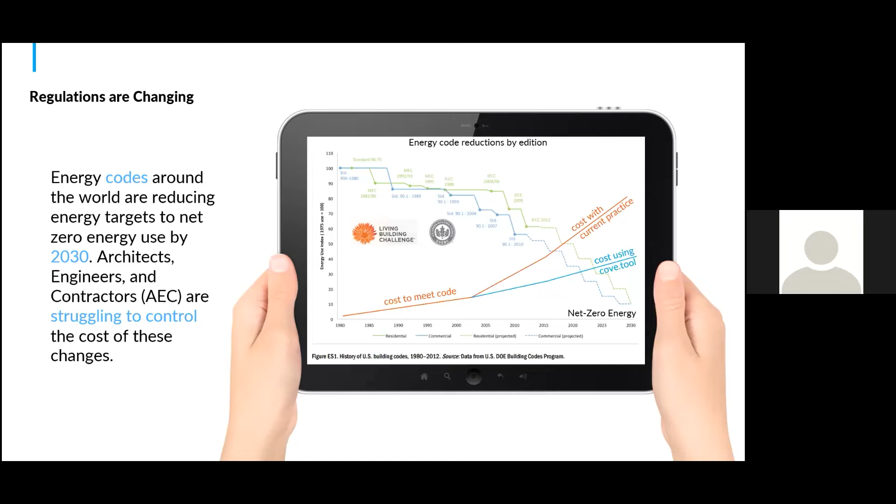And as we go through the case study today, we'll mix in real-time expertise and skill sets so we can understand how we can do this. And we'll build it in with the case study to talk about how the team actually utilized all of the performance data to actually make a difference and impact on their projects.

No surprise there. Imagine having to change your entire facade design at 80% construction drawings. That's a fairly expensive design revision; you have to coordinate across all the different consultants, sub-consultants. Someone has to spend a lot of time making sure everything is reconfigured. That's an expensive design revision.

Despite the fact that that is the least comfortable phase to make any design changes in, right? That construction drawing phase. That is where all of the traditional building performance modeling happens, because we're not doing it to drive decisions. We're not doing it to drive data-driven thinking. We're doing it to check boxes.

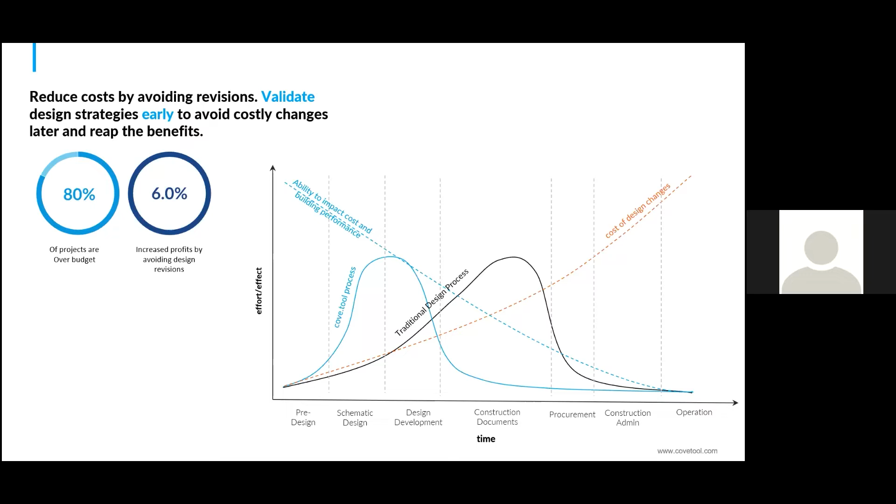The workflow that we're going to look at today is how we can shift that process earlier on into the design, into pre-design, concept design, schematic design, early design development, so that by the time we make it to the construction documentation, we don't have to do those expensive revisions, of course, increasing our project profitability by up to 6%, which is a really big deal, especially when margins are razor thin in the competitive market that we currently are in.

Now, prior to creating cove.tool, I ran a successful consulting practice. And in this sustainability consulting practice, me and my team worked on just about every type of project that you can imagine. Everything from a 5,000 square foot retail facility to millions of square foot office space, to labs, to healthcare, multifamily, hospitality, everything in the middle, all the way even to actually designing cities in different parts of the world, urban planning.

And what we realized was that no matter the project type or the project size, we always had to do a few core pieces of analysis. We always had to do our climate studies, right, to collect climatic information of where we're designing at. We always had to do benchmarking so we could figure out how our project compares to the rest of the country or the world. Had to do some conceptual energy modeling so we could really balance our project to that benchmark. Do some parametric studies, which is just another way of saying running iterations.

Do daylighting studies, glare studies, shadow studies, facade studies, and of course, pull everything together in a nice, easy to use report, because that's how the team makes a decision collaboratively, right? By utilizing outputs from a report.

And even on the simplest project, now granted, this was a good 5 years ago, and we were billable at about $150 an hour. It took us 250 hours. I'll let you all do the math of any price escalations that may have happened. Let's put it at $200 an hour. I'll let you all do the math on just how expensive it was to bring us on a particular project.

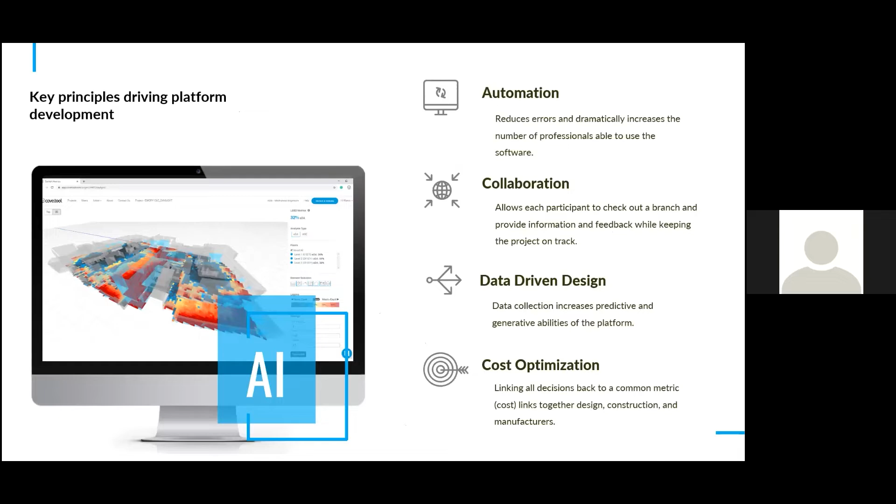Here's the case study that I want to share today. It's the third classroom and engineering building project designed for the University System of Maryland by Cooper Carry Architects and AEI engineers. And this is a 75,000 square foot classroom, lab, and dining project.

This particular team started the project and set up some high performance goals. In terms of energy, they wanted to be 30% better than industry benchmarks. In terms of daylighting, they wanted to meet at least a 55% SDA, which is a spatial daylight autonomy.

Basically means the amount of your floor plate that can operate without electrical lighting. They wanted to get to be under 10% of ASE, which is annual solar exposure. That's a glare metric, right? So just like SDA is the amount of daylight metric, ASE is the quality of daylight metric. So it's how much of your floor plate is in the threat zone for having too much glare.

So after setting these high performance targets, and the daylight and glare targets also coordinate very, very closely to what's laid out in the LEED and WELL building standard, which this building was thinking about pursuing. They weren't convinced right away, but they were thinking about it, right? So it's helpful to get your goals aligned early on.

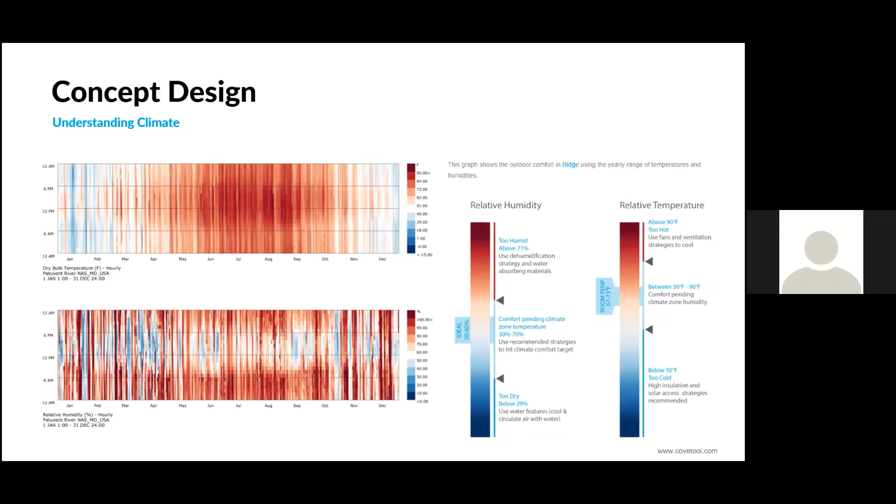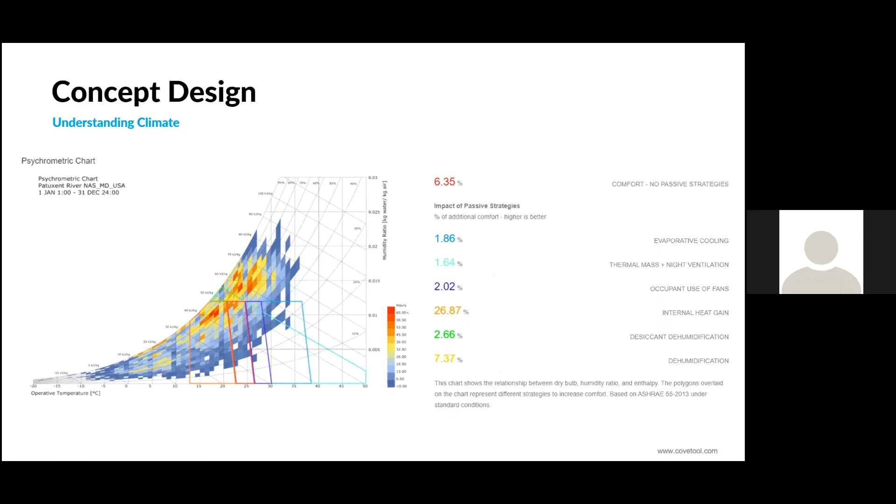If I know that thermal mass or evaporative cooling is not giving me too much help, right? It's under 2%, even occupant use of fans aren't helping either. I wouldn't spend time. And if I know that already in concept design, I'm not going to design outdoor porches with giant fans and use evaporative cooling because I already know that they're not effective strategies. The amount that they yield in comfort is extremely low. I'd be spending my effort on dehumidification. I'd be spending my effort on internal heat gain. And it's the ability to be able to see it all right away, automatically, that makes a really, really big difference.

The team was then able to also look at benchmarking to understand exactly how other buildings of the similar program performed, right? So the national average for this particular program was at 100 EUI, which is the energy use intensity, the amount of energy your building uses per square foot over the course of a whole year. Now, at the time, the 2030 targets would have wanted them to be at 30 EUI. The team wasn't committing quite that far, but they were wanting to be much better than national averages. So they set their EUI targets at 60 to 70 EUI, not by guess, not by just thinking here's what others are doing, but by looking at data about their program and their building in their climate zone and having that intelligence in real time.

They also utilized the same time to set up their benchmarks for daylighting and glare. And that was pretty much all they did in the concept design phase, is really set themselves up for success. Now, let's take a quick look to understand how we can start doing that together as well. So here we have it.

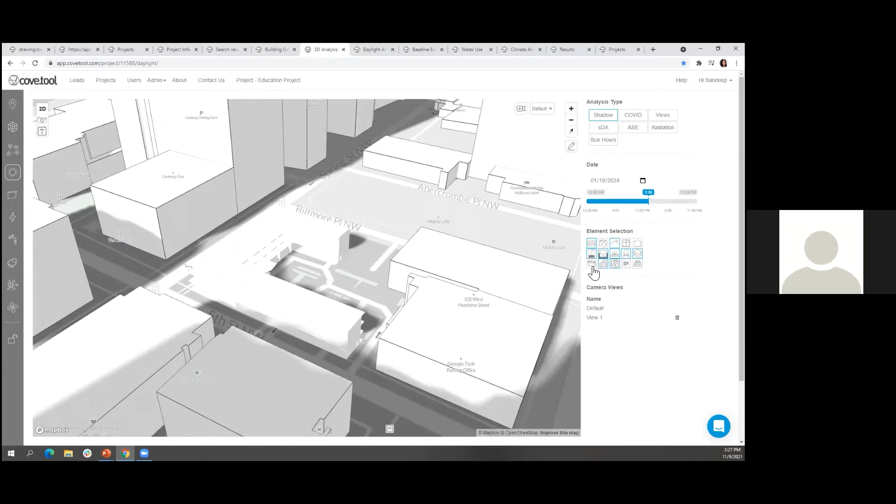So this particular team brought in their geometry, and then they moved on to the very next step of actually running analysis. Now, this analysis page, there's a lot of power here. Let's talk about it for a few minutes. Let's talk about what the key parameters are. Let's talk about what each different analysis type even means. And let's talk about how we can all start using it and how this team used it on the case study project. Now, just from a quick interface overview, we can see a whole range of analysis types covered here.

The key thing to note, this reminds me of back in the early days, right? When I was doing this manually, I was doing it as a consultant. Each and every one of these tabs would easily take me 20 to 30 hours. It was just so difficult to have access to this data. And it took so much technical expertise for me to be able to do that I couldn't say that everyone should be able to do this analysis, because it just wasn't possible. It was so difficult. I had to do so much debugging.

And my ultimate goal, at this large firm, I used to sit next to this fantastic principal. He was an extremely gifted designer, really, really good, and had done some really incredible projects. He was a tower designer, right? And I always used to admire his designs, but my gosh, Jimmy, while he was an incredible designer, he could not use technology for the life of him. And luckily, I was all about data and I was all about technology.

So I always used to run this analysis for him, like I did for everyone else in the 300-person Atlanta office. So I was the bottleneck. If it didn't go through me, it didn't happen at all. So my goal was that as we create cove.tool, Jimmy should be able to run every single analysis. And that is exactly what users have found.

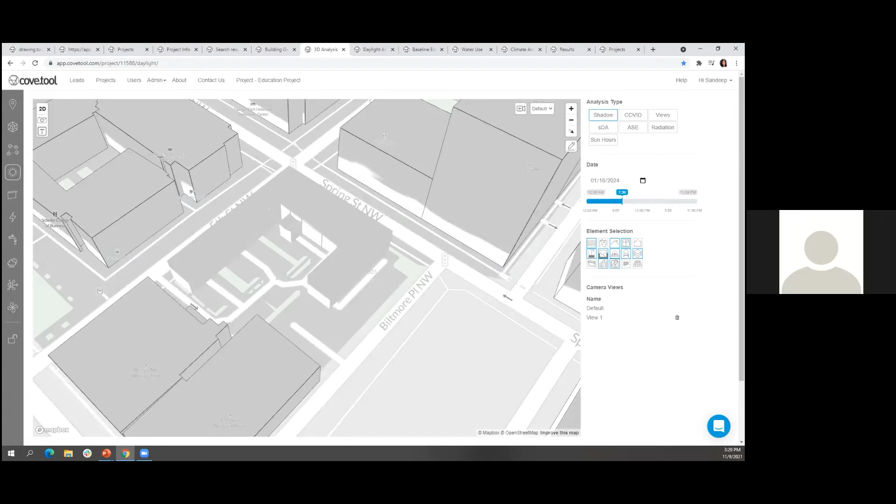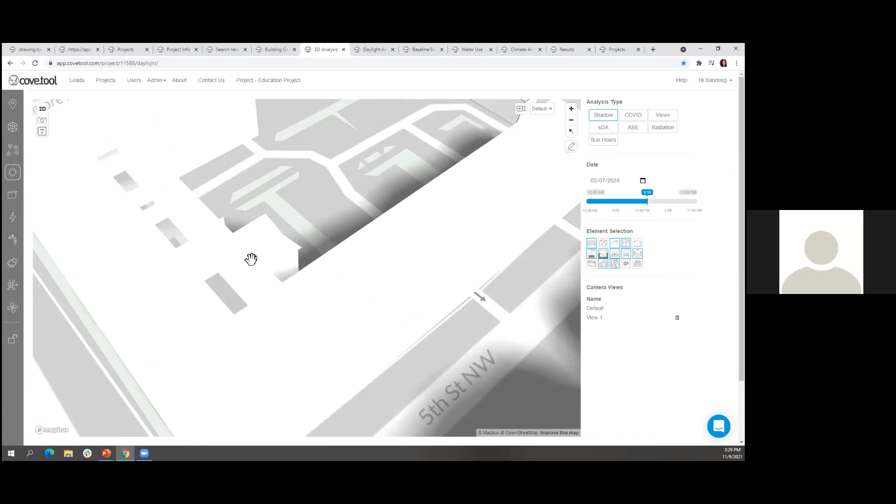So looking at shadow analysis, something that would have been so complex, we can now simply move a few sliders, change the year, change the month, change the date, and really understand how the shadow moves across a site, really understand where is a good spot to place an outdoor patio, where it's a good place to consider some landscaping, really make sure we can understand what part of our facade is under shade versus what part is completely exposed.

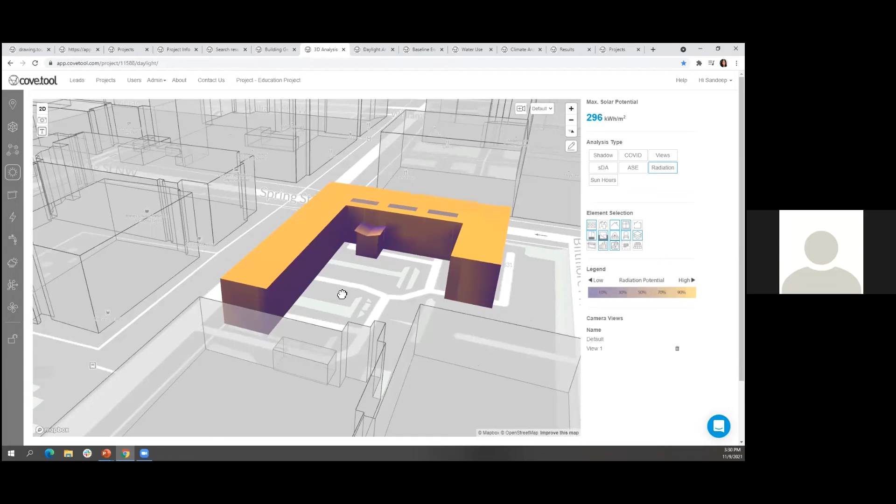And pair that with some radiation studies, right? To understand exactly where the sun falls, where we have the hot spots versus where we don't have the hot spots. The purple zone, as we can see, is low radiation, and the yellow zones are high radiation, to really be able to see that and have that data immediately and be able to not guess, not wait, not think that, oh, the project doesn't have budget, but to be able to have it and to be able to tell a strong design story about it is extremely powerful.

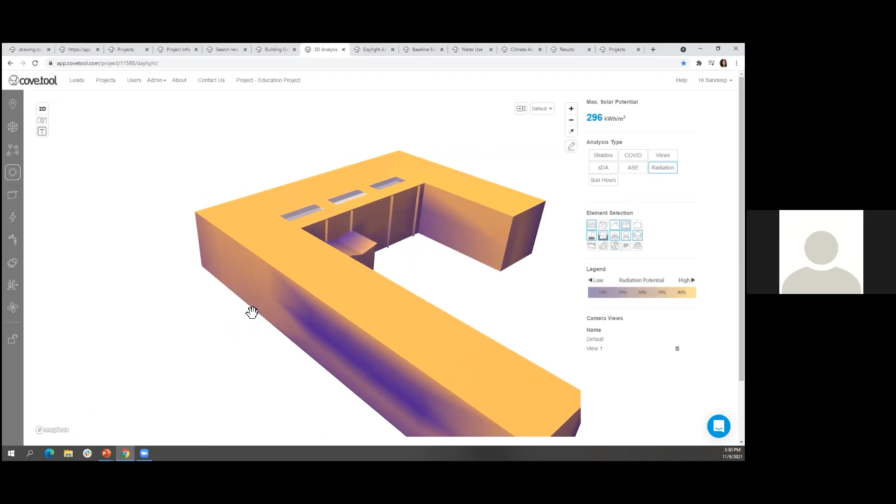I mean, if I had to punch openings for this project, I'd want to punch those openings in parts where I can attract some heat gain, because we learned in the psychrometric chart that internal heat gain is a great strategy from a passive standpoint. So I'd want to put all of my glass where I can attract the sun, right? Because that's a great strategy for letting the heat in, letting the sun in.

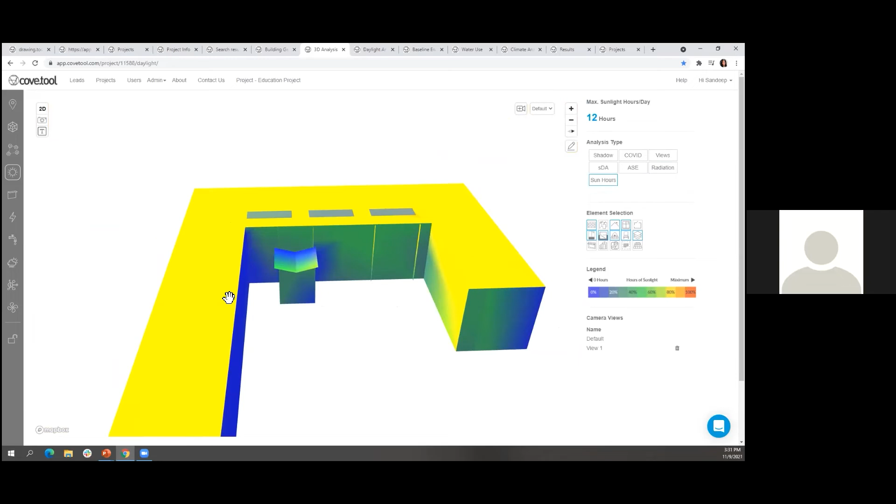And pairing that with sun hours to make sure, perhaps if we have some landscaping with a landscape designer planned over here, that the plants that we're proposing are going to be able to flourish and thrive in the 4 hours of sun that this part of the roof has access to. If we are perhaps thinking about some photovoltaic panels, back to the radiation analysis, we can see which part of the roof has access to more solar versus less solar.

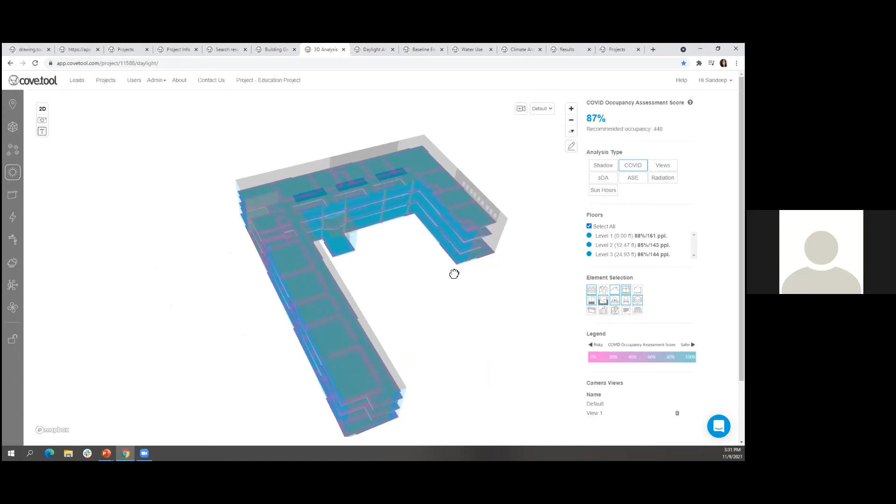Being able to balance all these 3 parameters together, I feel is immensely helpful. And just even getting these 3 for every project is a big step forward for most projects from everything that I have seen. Now, another analysis that's extremely helpful, but now getting less and less so because things are changing around the world for the better, is the COVID analysis, where you can see what is the new occupancy, how many people you can actually support with 6-foot social distancing.

But more importantly now, and consistently, is the view study. I remember being in healthcare meetings when I was a consultant, and the owner would want to know, does the patient room have a view to the outside? I also remember being in corporate office meetings, right, where we were designing an office tower, and the owner would want to know, do we have a view to the outside? Because they could sell or lease it for more. Also remember being in hospitality meetings where the owners wanted to know, does it have a view to the mountains, or does it have a good view, because then we can charge more for the rooms.

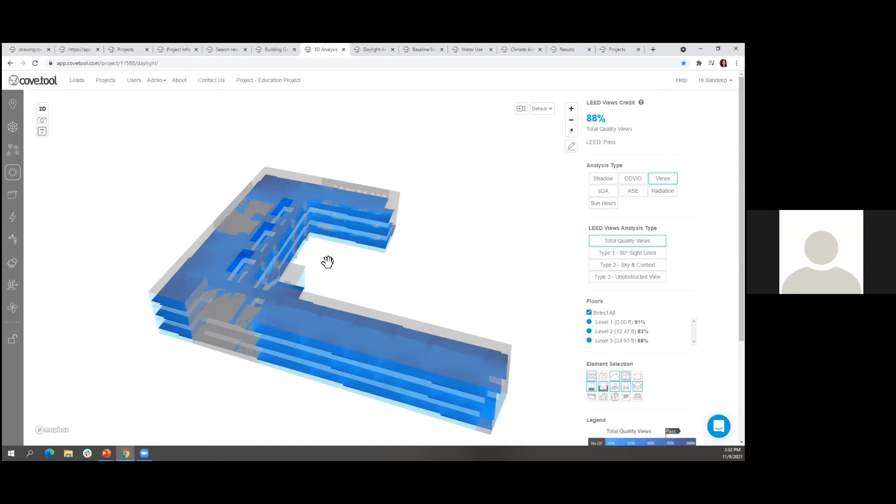That same intrinsic concept that views relate to higher value for the owner is true across pretty much every project, perhaps with the exception of something like a data center, where humans are not necessarily going to occupy the space. And despite the fact that views are such an important part of design and how designs can create value, most projects don't study view. For one core reason, it's very difficult to do so. I ran it manually. I was the expert. I was running all the view analysis on projects. It took me a good 70 to 80 hours to be able to run a view analysis. Not every project can afford that. Not every project has owners that are ambitious enough to want to explore that. Doesn't mean they don't want good views.

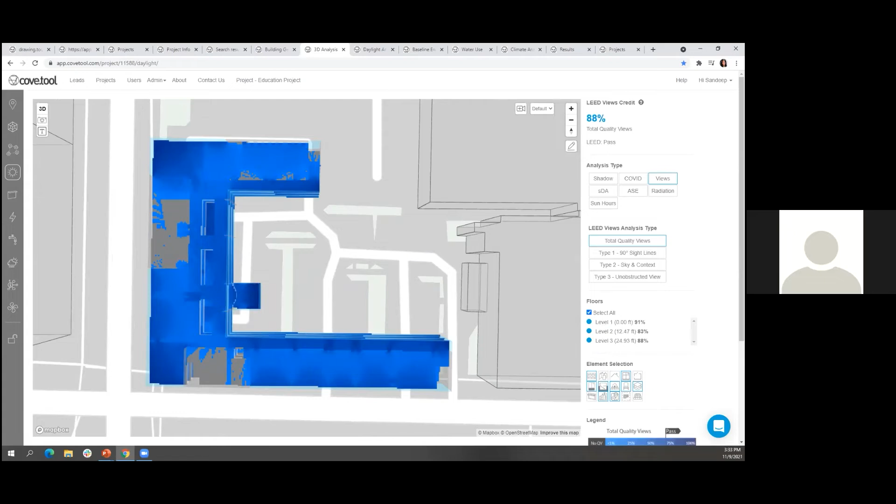But if it's available right here so that I can see in real time, okay, deeper the blue, the better the view. And I can see that on a floor by floor level, that gray means horrible view. I'd want to put my restrooms in the gray zone. I'd want to put my key suites, my key areas of the design in the deep blue zone, because I want them to have good views. If perhaps views to the sky and context is more important, I'll look at that. If perhaps just having a view is more important, I'll look at that. If we're looking holistically at a view, well, that's exactly what I'll look at.

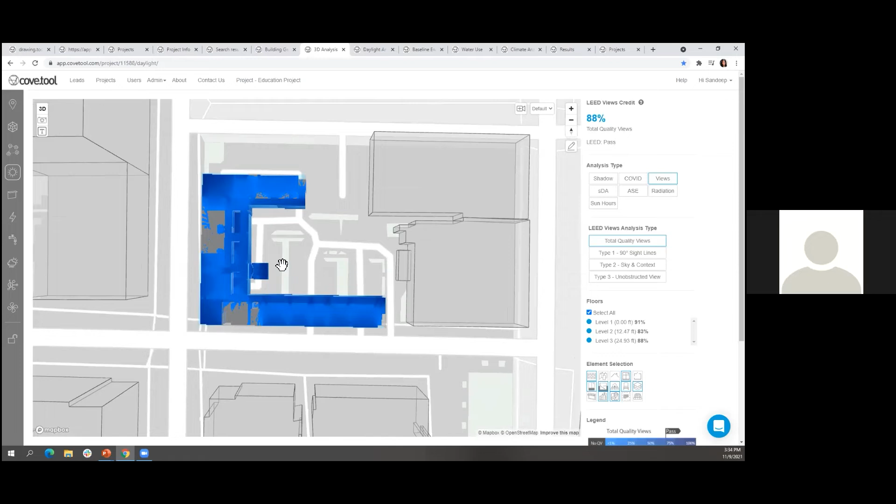But it's such an important analysis type, and I think is often not looked at enough or not studied enough, predominantly just because of how difficult it used to be. But now everyone can do it, so we might as well. The same goes back for the daylighting analysis. Here we're looking at spatial daylight autonomy. Now, of course, we're in the plan view, right, of this 3D project.

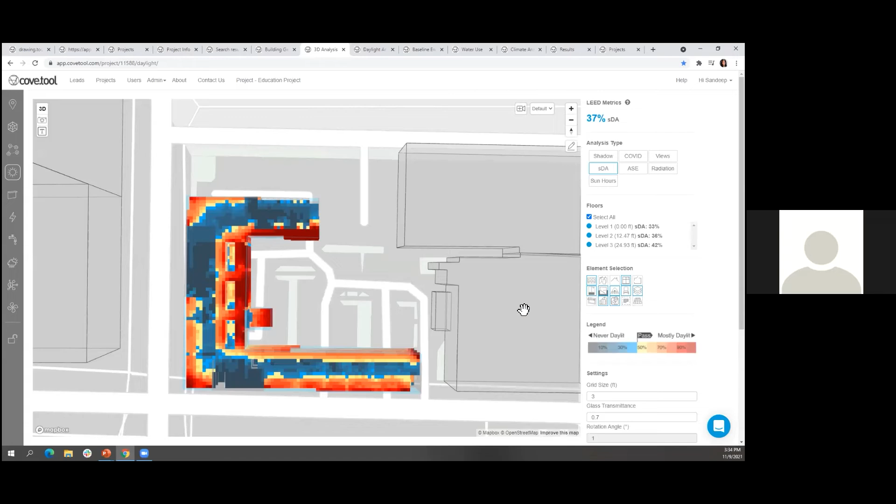But let's go top view. I like the top view. And let's have the north facing up. Okay, there we go. Now, the brighter the orange, that means the higher the amount of daylight. Blue means low daylight. And we can see that on a floor by floor level to really see how that varies. And also balance that with ASE, the glare, right?

To really see where we have no glare, which is the green zones, where we have some glare, which is the yellow zones, and where we have lots of glare, which is these deep red zones, and really be able to understand where we have key challenges. Because if the project is on a tight budget, I don't want to waste any money adding shading devices where I don't need them, right?

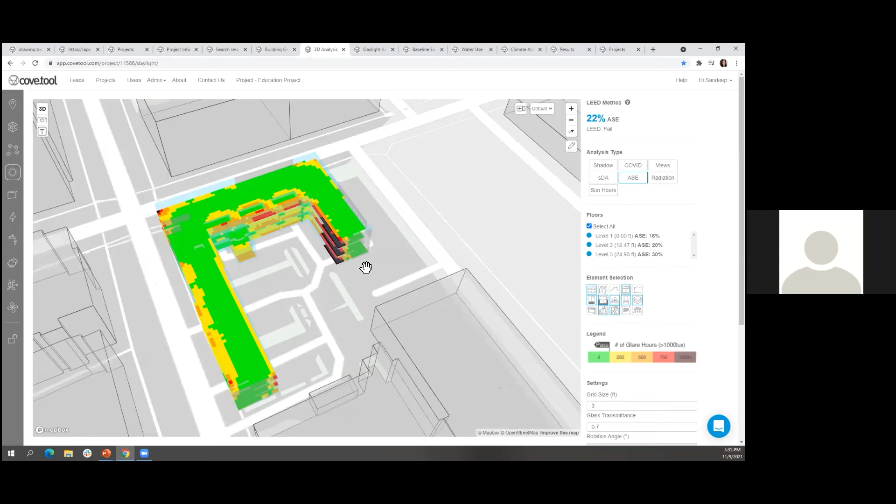We see the north, that's a fairly obvious one. Even in this case, the west, we're fine. This context building is casting more than enough shade on my project that I don't need to waste any project dollars putting shading devices here. Where I will put shading devices is here, here, and here.

If I didn't have data, I don't know how I would arrive at that conclusion or how I would arrive at the correct conclusion. Because I mean, I'm an expert in sustainability consulting. This is what I have done for years, all day, every day, for hundreds of projects. And I couldn't even answer that with just a rule of thumb because there's so many factors at play. The only way to know that for sure is with data, which in reality, the project team did when they were working on their project.

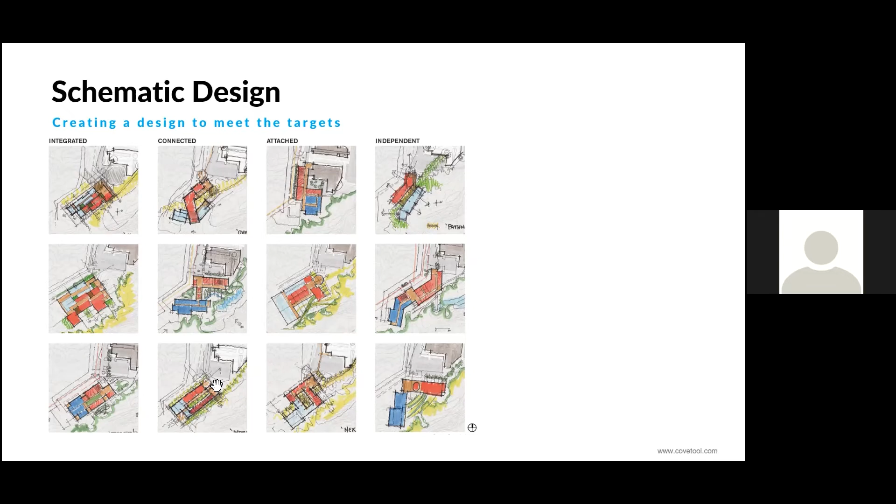Each one of these options is different in terms of the program, the master plan, how it's laid out, visuals, aesthetics, to really say, this is what works, this option does not work, and to really be able to layer it with energy, to be able to layer it with daylighting, and tease it down to the top 3 options at the end of schematic design phase. Now this team had these 3 options, right? Option 1, 2, and 3.

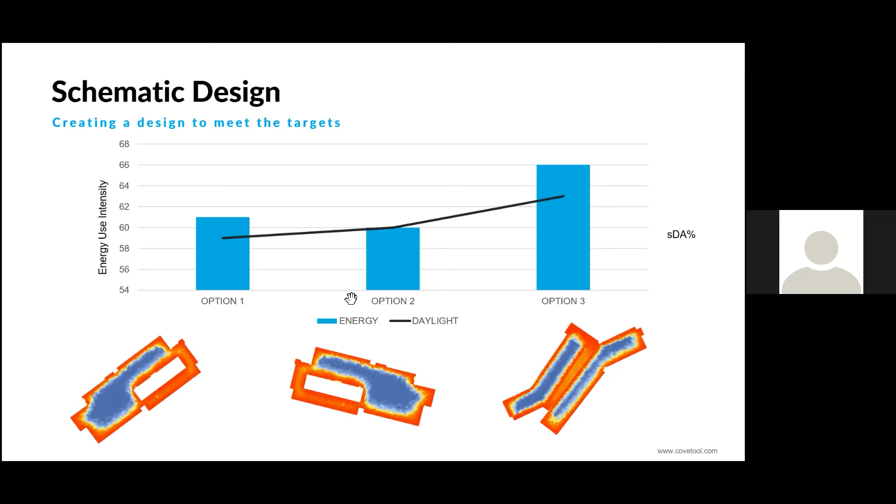And it's okay to choose options based on aesthetics. It's okay to choose options based on programmatic elements. It's okay to prioritize master plan, but we need to know exactly what we're choosing. We need to know what we're giving up. They went ahead with option 3, it used more energy, but they knew that in the schematic design phase. They knew that, okay, we need to spend all of design development to bring it back down. And that's exactly what they did in design development with cost versus energy optimization.

So they went ahead and created 3 different roof section options, right? Each with a different pricing point. Did the same for glazing. Did the same for different mechanical system types with different price points. I know that it only looks like 19 technology options, but if you look at every option with every option, that's 864 possible combinations. That's far too many options for any team to study manually, which is exactly why they use the power of automation.

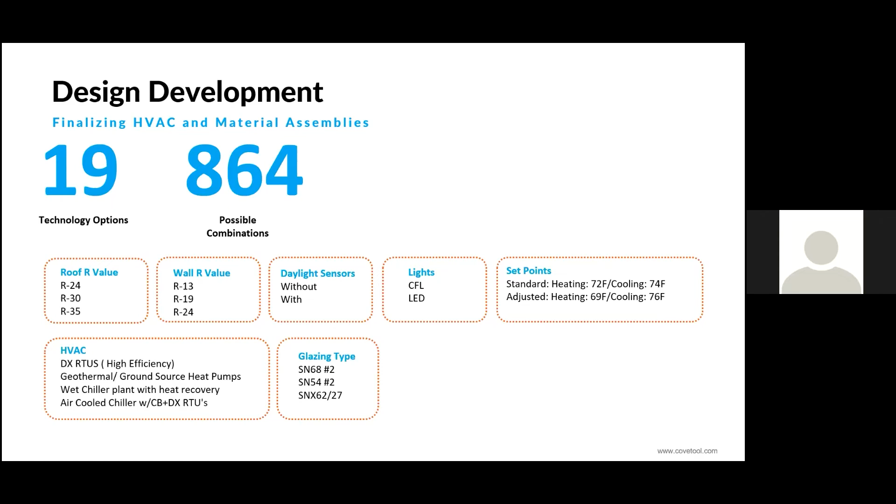Now, each vertical axis here is one decision point, right? So daylight sensors, either we have them or we don't have them, right? Glazing products that they were looking at.

Lighting types, if we do CFLs or LEDs. Roof, which section are we going with? Set points, do we adjust them or do we just keep whatever the university standard is? System type, which mechanical system do we actually go with? And they were able to balance that for energy, for cost, right? Money spent up front, and for energy savings.

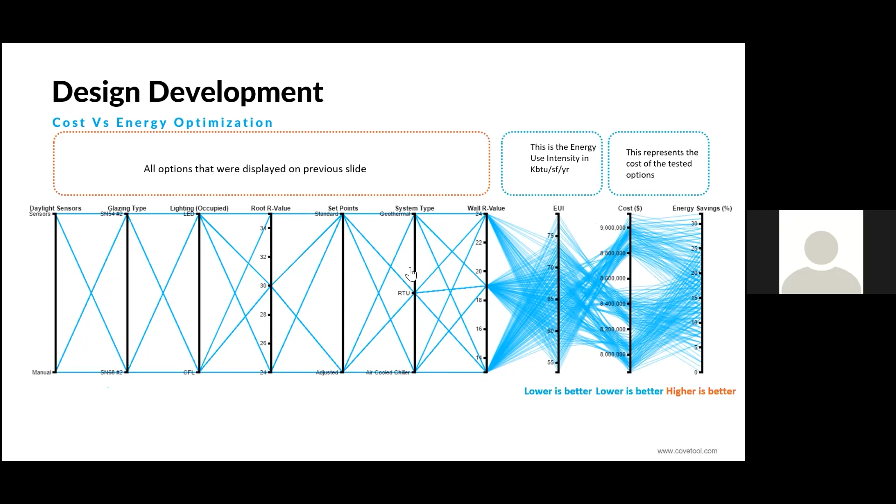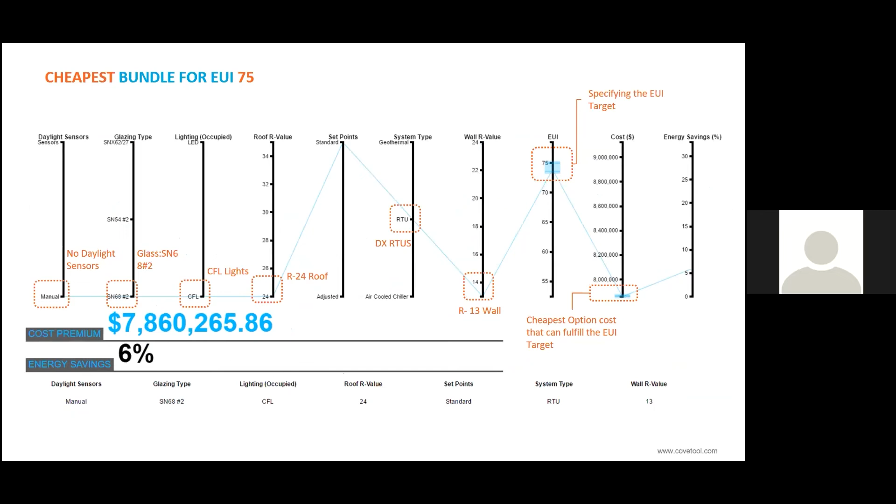And they started creating bundles, right? They looked at, okay, if our EUI target is 75, what are all the different ways that we can get to that EUI target? And then let's pick the absolute lowest cost way to do so, because why wouldn't we? If our EUI target is 65, the cheapest range is about 8 million and the most expensive range is about $9 million.

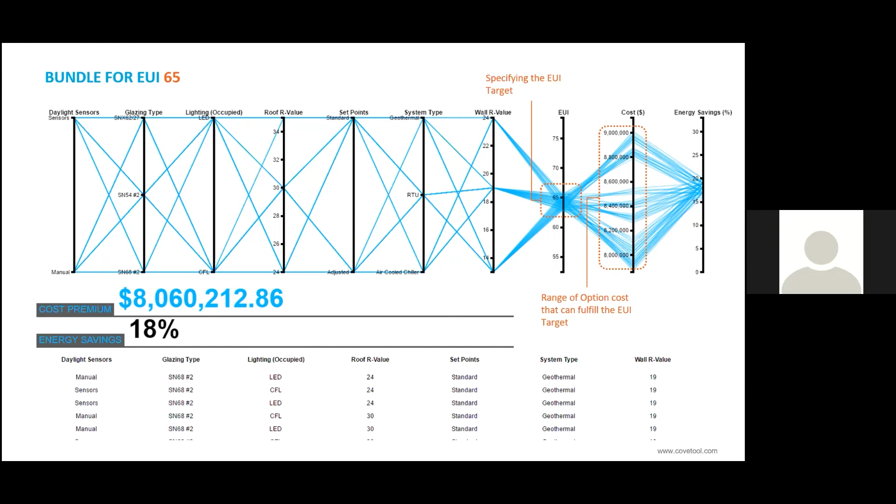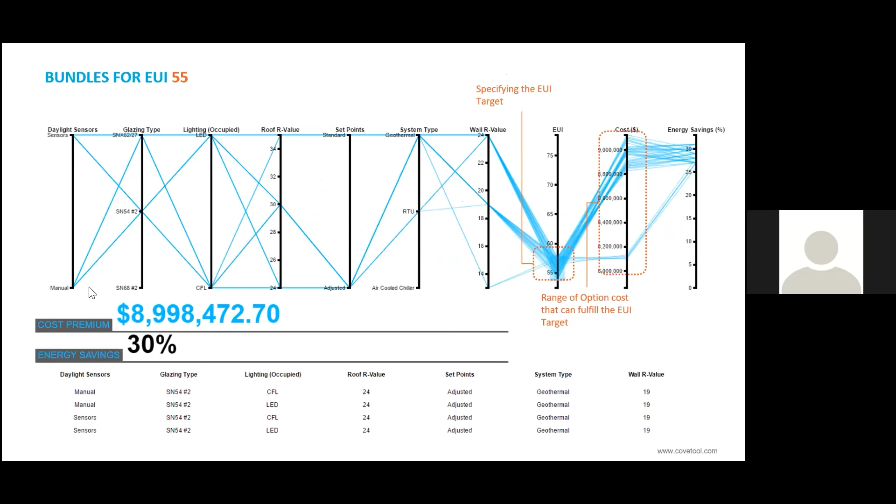I don't know any owner that would want us to choose poorly, what the cost of a bad decision would have been. The absolute lowest cost way to do so. Same for the EUI 55. They were able to then take these options and present them and also figure out a few patterns and a few things that were common.

No matter the EUI target, it never made sense for them to spend more money than code minimum on the roof. But no matter the EUI target, it didn't matter. It just didn't matter what the team went for. They just had to pick this particular one.

Sandeep, we are having a little bit of trouble hearing you. It's intermittent, but it's frequent. Maybe you can refresh your audio. Our apologies. No worries at all. Thank you very much for letting me know. I just hit refresh. Can you hear me? Not very well. It's quite intermittent, now it's about every 30 seconds or so. One of our participants is suggesting that you call in on one of the audio only lines, and that may get you a better connection. We won't be able to see you, but it might be an improvement. In the meantime, everyone, feel free to put any questions for Sandeep in the Q&A function. Thanks everyone for your patience.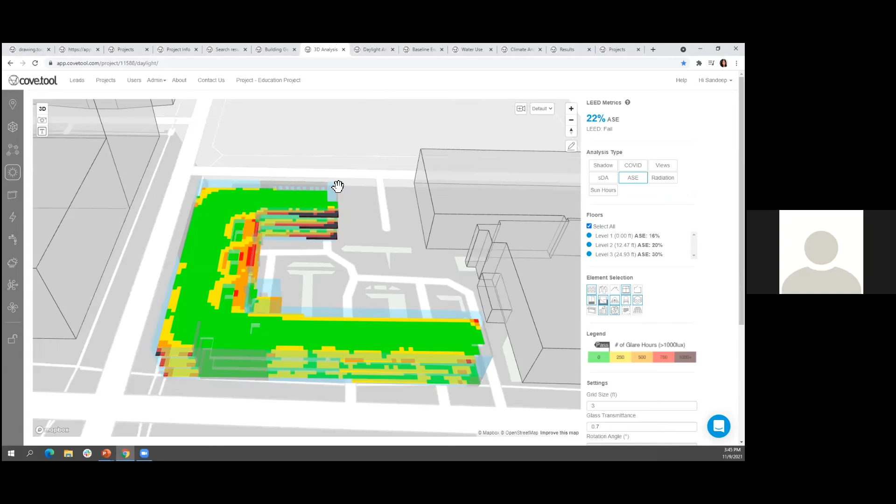Here's a quick look at being able to do that in real time, because I think there's something to it, to be able to tie back the actual analysis and how it was utilized in the case study to being able to see it visually and what it feels like in real time. So of course they did all of these studies to be able to have good findings.

They moved right along to energy analysis, and they were able to create their automatic report, which again, is immensely helpful. And the whole point of creating the report, I remember having charged in my previous life $10,000 to $15,000 for a report like this. And I knew that not every project could afford that. And the whole goal of this report is to democratize access to data, to make sure that everyone can use it and have as many of these for as many projects as they're working on,

with, of course, walk score, transit score, bike score, the actual energy analysis, all of the benchmarking pulled together, and the water use information all pulled together in a nice, easy to use PDF analysis. The report also highlighted all of the climate analysis and the passive strategies and water use. Water is a really, really big constraint when it comes to quite a few projects.

So being really able to study the number of LEED points, the actual indoor water use, how much does it affect if we have some low flow fixtures? How much does it affect if we have some gray water versus no gray water strategies? How much does it affect if I use sprinklers versus drip irrigation? Does it matter if I have turf versus native plants? What does that do to my overall irrigation and water requirements?

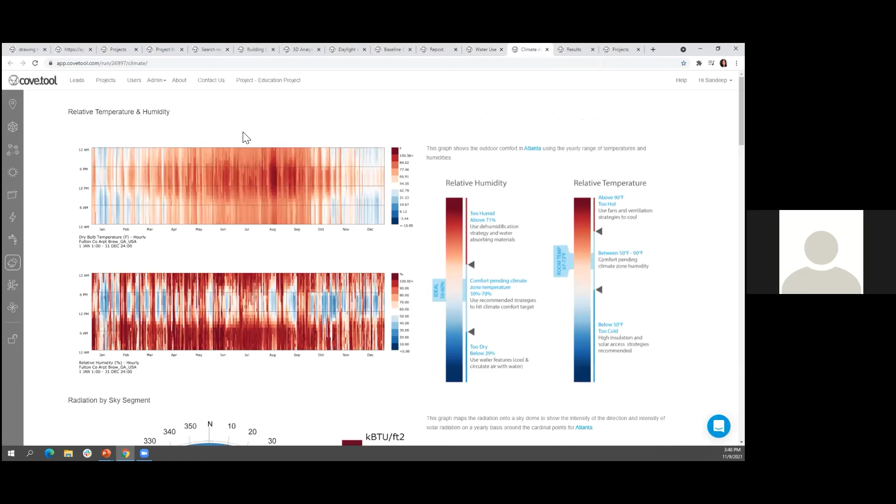And of course, we already touched on the climate analysis, but here is the optimization, where we have all of the vertical axes, each being a decision and each point within it being one product type, right? For glazing, I have all of these Viracon and Solarban products. For wall, I have all of these different assemblies. And being able to balance that, in this case, they were even studying the support structure. Should it be mass timber or should it be steel?

Because that has a big impact on the overall embodied carbon, which is also directly tied in with the open source EC3 database into the app. So you can see how much embodied carbon you have, what the cost is, what the payback is. So for example, if I was working on a project and the owner told me, let's not even look at options that are more than 2 years of payback or 3 years of payback, well, I can simply use a slider and only look at options that meet that.

And within that, if I had to find something that was low carbon and low cost for the highest amount of energy savings, boom, here's my answer. I spend $15,000, get to a 25% energy savings, get to low embodied carbon, and I can see exactly what it took for me to get there. And I can study as many alternatives as I like based on the situation that I'm in. If a product type is no longer being considered, I can simply go in and take them out.

If a project category is no longer being considered, perhaps we already figured out what our skylight assembly was going to be, I just remove all the options, study the ones that are currently on the project and hit recalculate, and it just keeps rerunning the project to find me the most cost optimal options for the actual design.

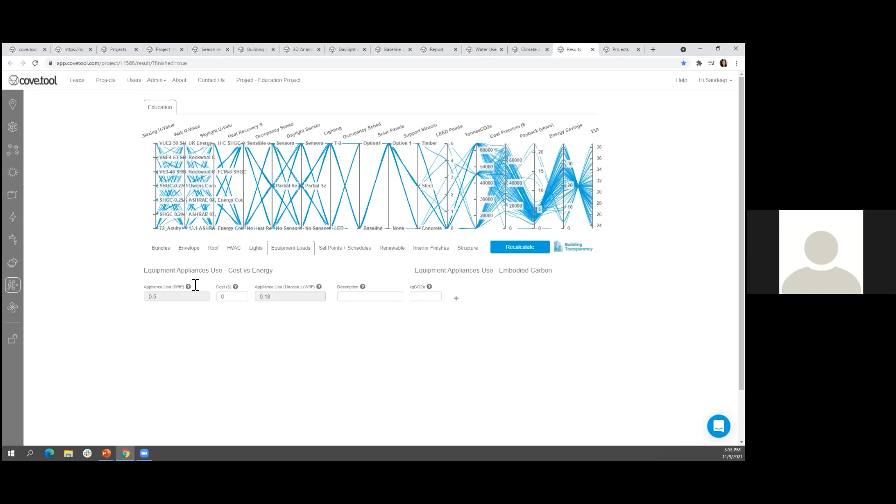That's interesting. They're interesting questions. I'm going to venture to say that AIA California, in serving our members and our other strategic goals, is looking for opportunities should a critical mass of members need a tool that's individually inaccessible or too expensive. Are there ways for us to provide that for our members as a member benefit? So that's feedback that we'd like to get.

Here's another question. I only need to use Cove for LEED, for daylighting and views. Is it worth the cost? Absolutely. If you look at just pure LEED views and daylight, let's do a quick cost comparison, because we run tons of these studies. I run a business, so comparing cost is extremely critical for me.

So if you look at just the LEED points for views, there's tons of LEED documentation. Let's look at some. Doing just your LEED daylight calculation will easily take you about 45 to 60 hours on a simple project, and about 100 to 150 hours on a more complex project.

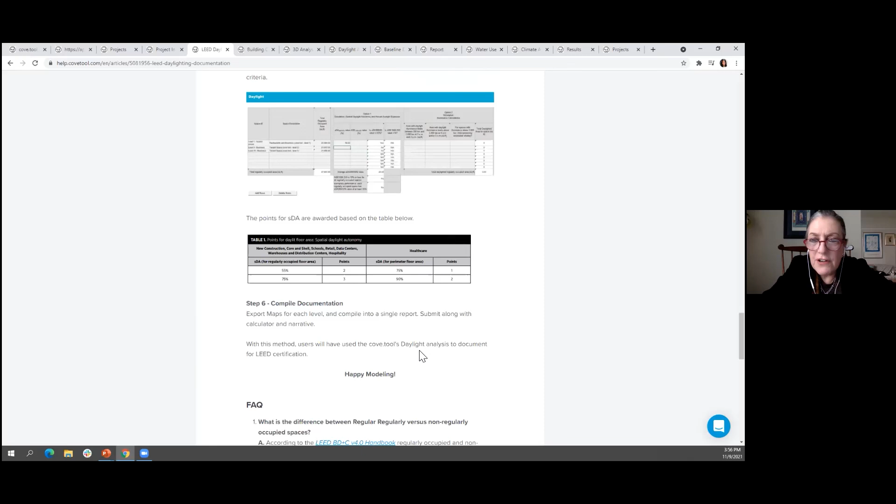Interesting. The next question, I think you just answered it. What is the usage for LEED submissions? I'm guessing there are multiple ways to use it in preparing a LEED submission, and you've just shared one example. Is that right? Absolutely. So what we're looking at is actually how to log your LEED credits, and there's different types of USGBC LEED documentation that you can do within the platform.

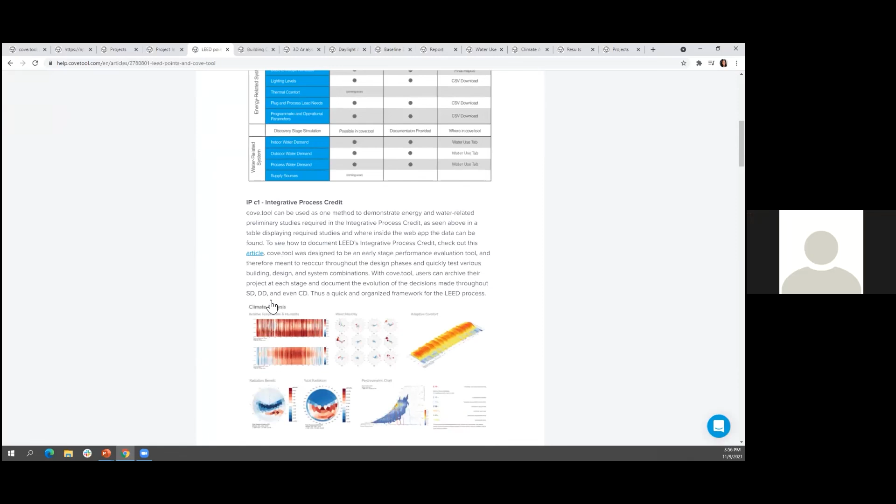Here's all of the different points that you can log for utilizing cove.tool, and there's additional documentation available for each of these points separately, which walks you through step by step. For example, here's just the quality views documentation. There's documentation for integrative process. So there's tons of documentation available on the Help Center on how you can get many different LEED points.

And this is my question. Your Help Center, when the participants sign up for the free trial, will they be able to access your Help Center as a trial member, so they can look at it? They absolutely will. The goal here is education.

I don't believe that we can drive change alone. Like, I can't fight climate change alone. I could only do 200 projects as a consultant. And while that was a lucrative business for me personally, it wasn't lucrative for the world. We needed to make a bigger impact. We needed everyone to be able to do this, to offset the sheer amount of carbon that we need to. Just this year, we've offset 27.6 million tons of CO2e. And to put it in perspective, that's 5x of Tesla. So we're driven by change. So absolutely, the Help Center is available to everyone that signs up for a free trial.

And those logos at the top of your page, are those customers? Yeah, we have thousands of customers. These are just some of them. There's thousands and thousands of customers, really. Here's a few more logos if we all like logos.

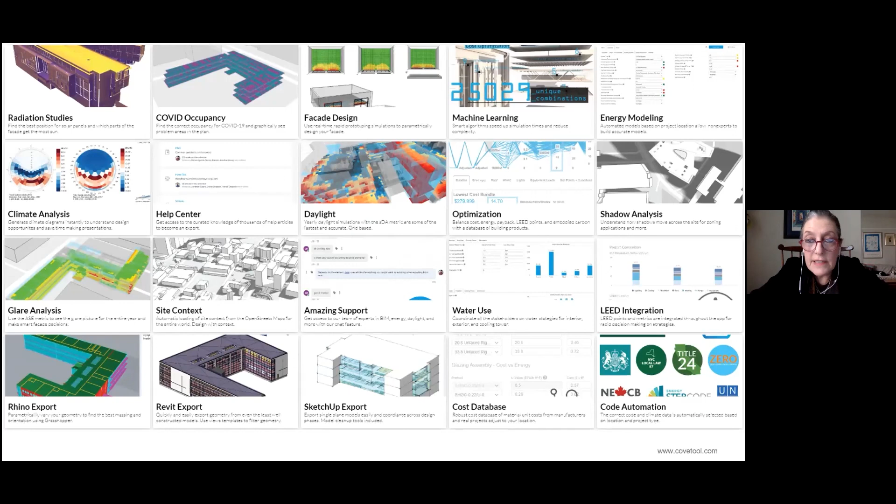Well, I was just curious because, of course, there are different ways projects are delivered, right? Projects are delivered with upfront design using traditional delivery methods, with full architectural documents in a model like what you've explained, but many projects are led by a general contractor. In which case, if M.A. Mortenson and Beck were up there, that means some of your general contractor partners are utilizing the tool, which through the subcontracts, an architect on a design build project, for example, would have access to use perhaps through their prime contractor.

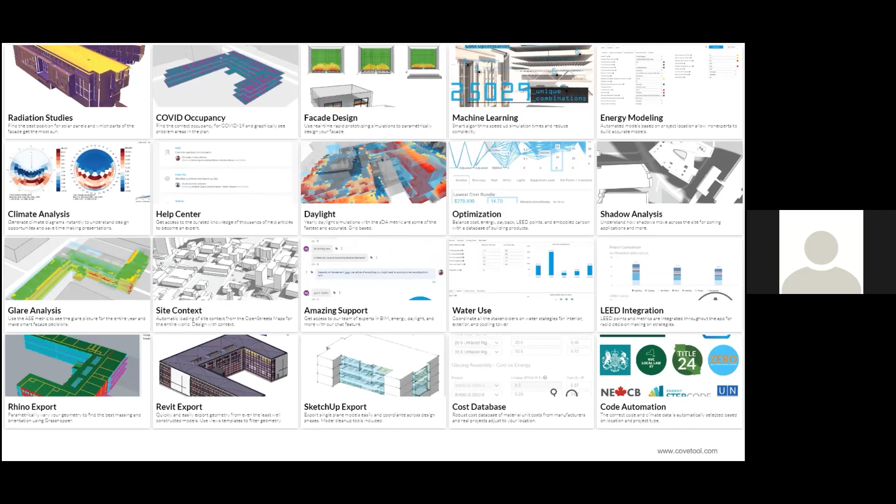Right? It is actually both, but predominantly it is driven by architects. For example, someone like Beck, of course, has a design build team. But if you look at some of the other contractors like Skanska, they're utilizing it not necessarily to run all of the analysis. Sure, they'll care about the materiality because it impacts the embodied carbon, but the know-how of how to impact the design in terms of daylighting or views or glare, and how to affect it through massing, I'm hopeful that still stays in the architect's court.